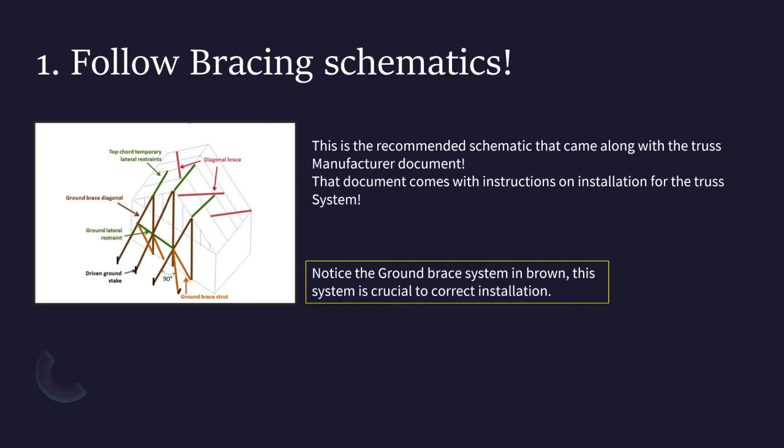Tip number 1. Follow bracing schematics. This means recommended truss installation schematics that are included in the manufacturer document, like the ones in this slide. Notice the ground brace system that is colored in brown. This is crucial roof truss information.

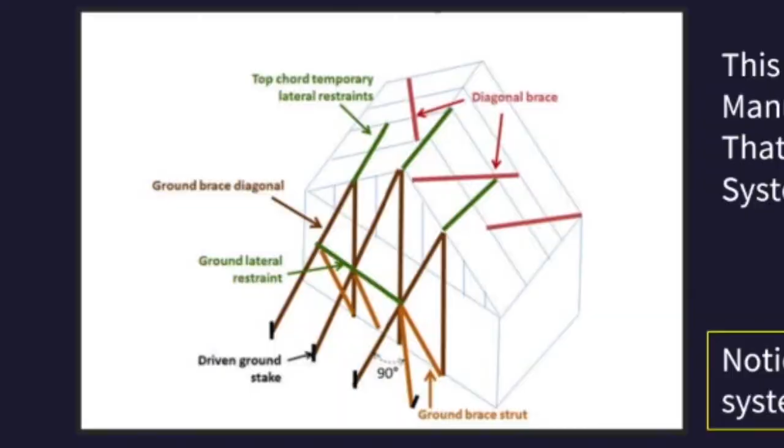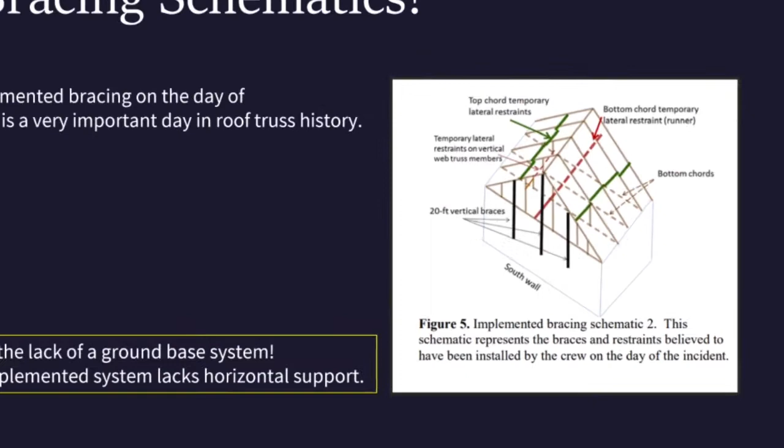This schematic is the implemented bracing on the day of September 6th, 2013, which is a very important day in roof truss history. Notice the lack of ground-based system. This implemented system lacks horizontal support. First off, I just dropped a really important date back there, September 6th, 2013.

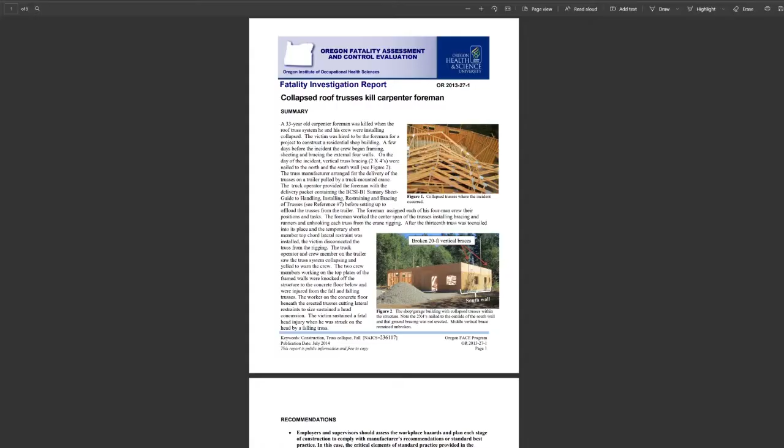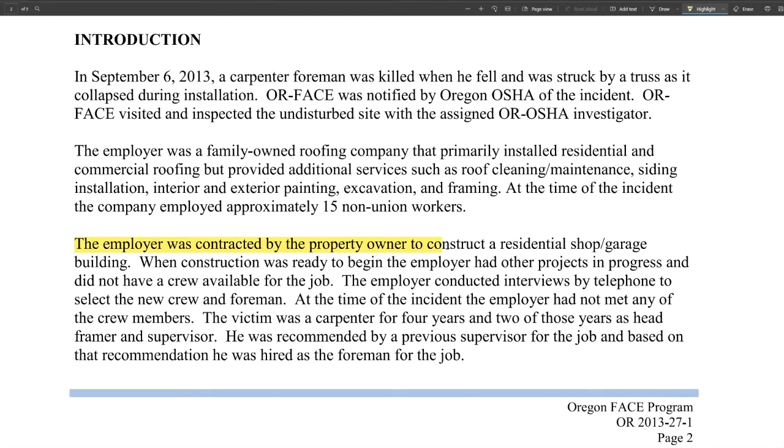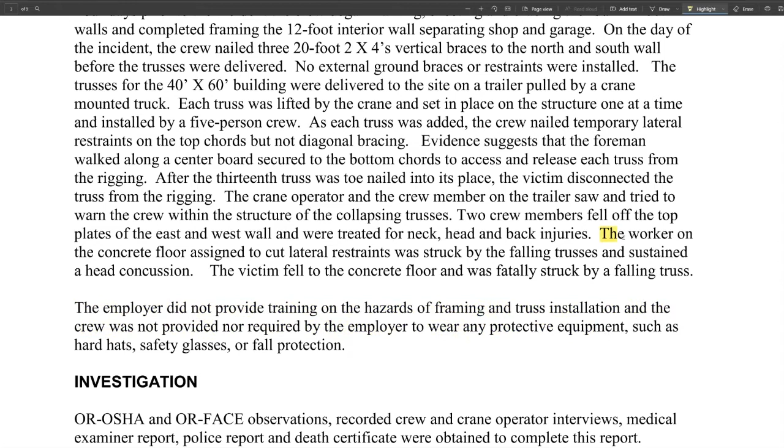This was an OSHA article that I researched when compiling my list of 10 things that I would do to avoid being crushed by a roof truss system. This article covers a work crew being hired to make a commercial shed out in Oregon. The men hired were hired over the phone after just a few questions and were brought on board to work with little to no training prior. This led to a misstep in the installation of the roof truss system for the shed, leading to the death of a 33-year-old carpenter.

This ties well into my third tip. Don't be the worker on the concrete floor. In the OSHA case 2013-27-1, which is the case I just talked about, the 33-year-old carpenter on the concrete floor is a cautionary tale about roof truss safety. And what we can learn from this past experience is, tip number 4, construction of roof trusses on the ground, with them then being lifted into place by a crane, would have prevented the case

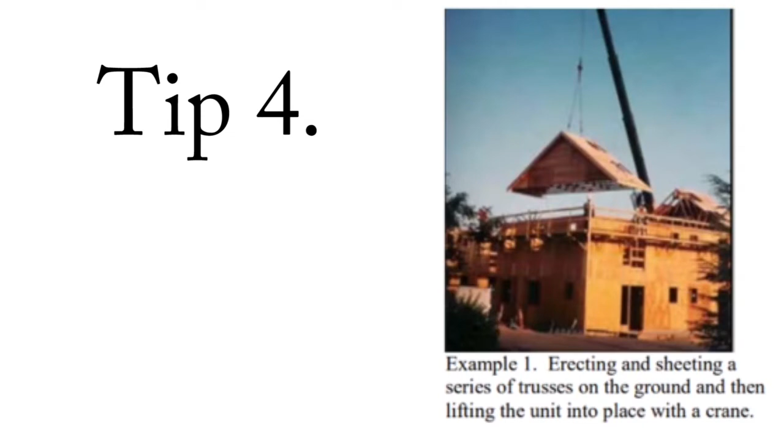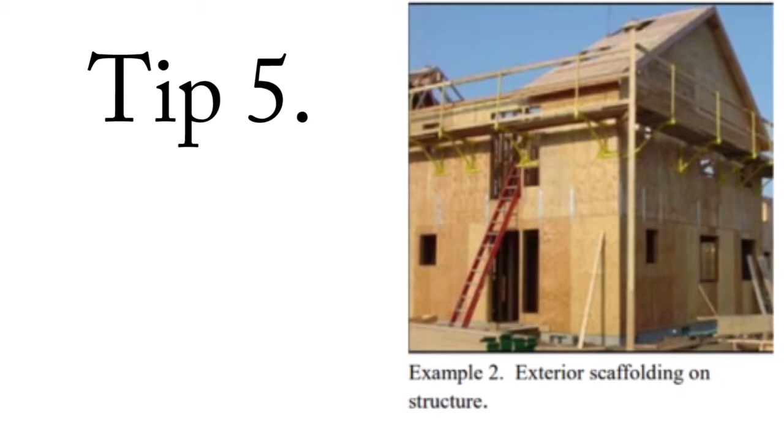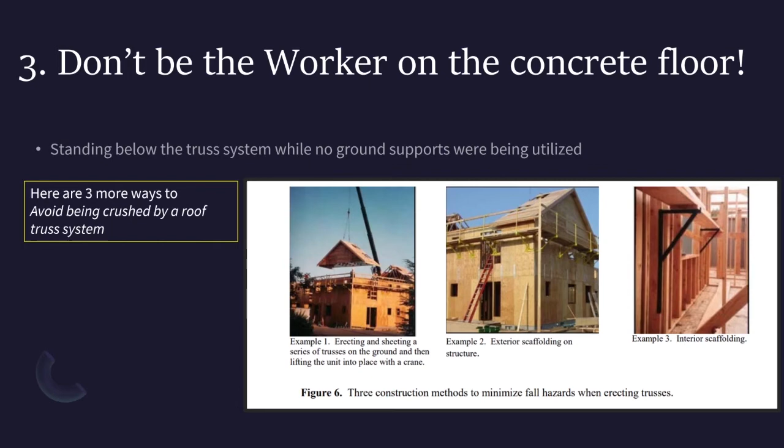2013-27-1. Tip number 5, exterior scaffolding on a structure would have also prevented such accidents, with tip number 6, interior scaffolding to brace roof trusses. Basically, all three of these options would make it virtually impossible for the roof to collapse, and it would have prevented such accidents, such as the case 2013-27-1. Alright, 7 tips in.

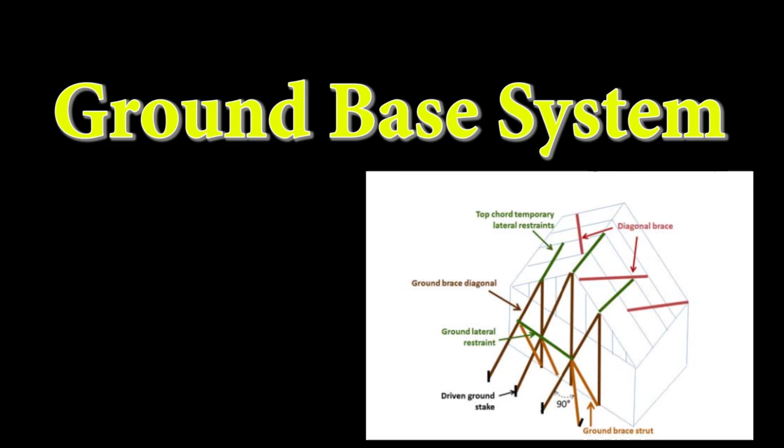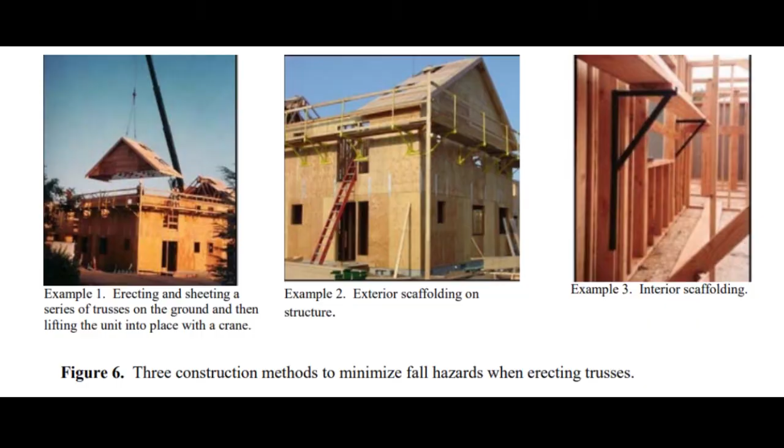That's most of the basics covered, including ground support systems, those brown lines from the first schematic, other important facts from the ORFACE 2013-27-1 case, and the exterior/interior brace systems. The next 3 tips are the most effective that I've found, and will be mostly based off the facts brought up in the first 7 tips.

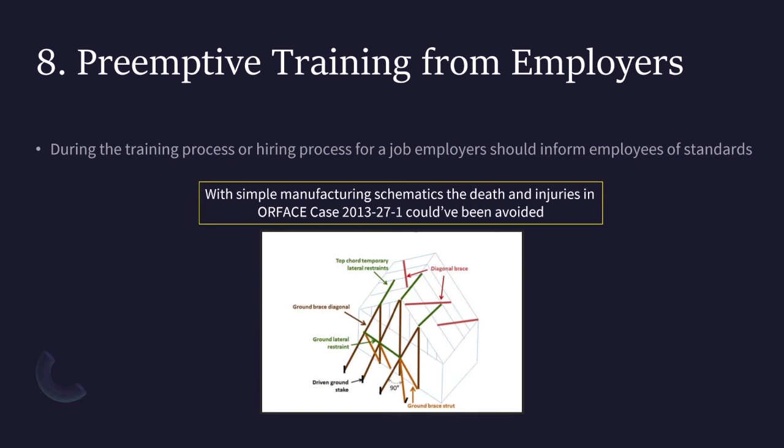Tip number 8, preemptive training from employers. The example from case 2013-27-1 showed a lack of training from the contractor, as the crew was just thrown onto the job site with no training on how to use correct schematics for installation.

Tip number 9 is also largely related to the incident in the case, as the minor questioning the crew received at the beginning of the job was not nearly enough to truly assess the abilities of those being interviewed. Phone interviews only is a no-go. Lastly, tip number 10 is to just go research roof truss accidents yourself.